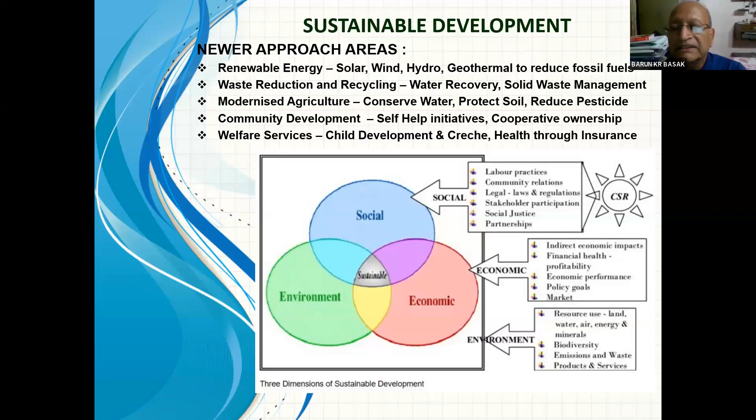Sustainable development goals, you have already seen in the last lecture, last session, that it was adopted in 2015, the target being 2030. There are 17 goals, and these are constructed in form of three basic pillars. One is environmental pillar, second is social pillar, and the third one is economic pillar, giving all the sustainable development 17 goals categorized into these three pillars.

Make cities and human settlements inclusive, safe, resilient, and sustainable. Make them hubs for ideas, commerce, culture, science, productivity, social development. And very important that efficient urban planning and management are put in place.

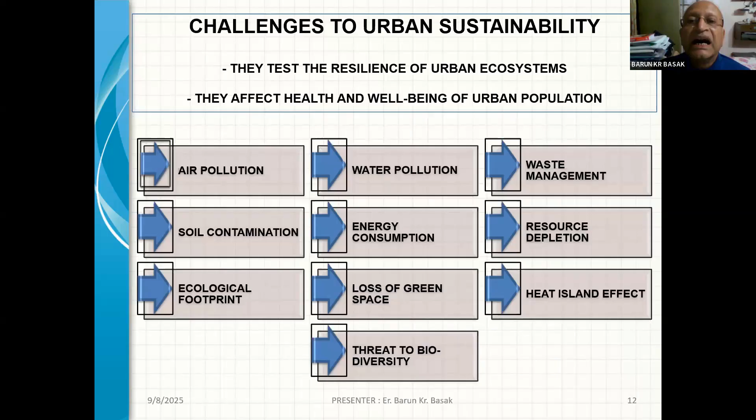What are the factors? Air pollution, water pollution, waste management, soil contamination, energy consumption, resource depletion, ecological footprint, loss of green space, heat island effect, and threat to biodiversity. These are the challenge areas. We need to address each of them separately, with technology and strategy.

What are the effects of these hazards? Mindless urbanization eventually affects every citizen, you, me, and all. Inequality of distribution leads to unrest and insecurity. Pollution deteriorates everyone's health and productivity, we all know. Economy gets affected from poor labor productivity. Enhanced natural disasters disrupt everyone's life.

Poorly planned urbanization generates huge slums. Quality of life suffers both at home and in public places.

Now, after the pledge was taken in 2015, the SDG 11 urban sustainability goal, what has been the progress so far? The number of nations with national and local disaster reduction strategies in place doubled by 2024 from 2015.

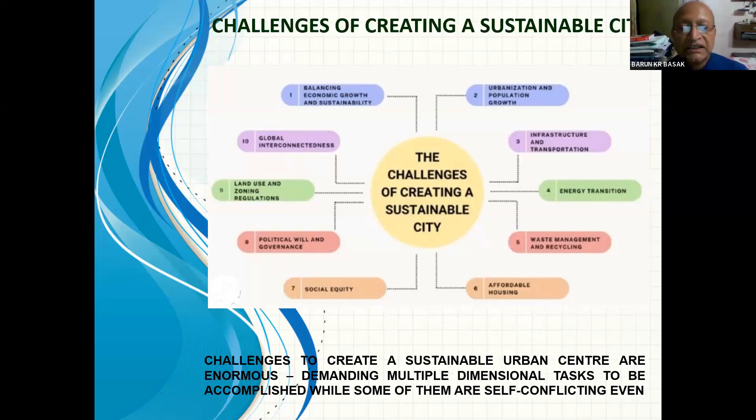Now, challenges of creating a sustainable city are shown in a diagram. The challenges are in the center, then around it: balancing economic growth, sustainability, global interconnectedness, land use and zoning regulations, political will, social equity, affordable housing, waste management, energy transition into renewable infrastructure and transportation, urbanization and population growth. All these factors are pictorially represented here. The challenges to create a sustainable urban center are enormous, demanding multiple dimensional tasks to be accomplished, while some of them are even self-conflicting. That is the problem.

Now, how do we plan for sustainable urban designs? These are some of the factors shown in the picture: walkability, where people should be able to walk freely, connectivity and connections, then shifting from private transport to public transportation, bicycle tracks, mixed use of infrastructure, and transport shown which can be underground. An important consideration in planning for sustainable cities would be its people and their connectivity.

Density in view, stress on eco-friendly public transport like hydrogen and electric, well-designed walkways supporting the aged with walking sticks or wheelchairs, children, so that they do not trip, and the challenged. Everyone should be able to use the walkway safely. Bicycle tracks, you can see those in many advanced countries, including in Japan. Even in Japan, people go to workplace by cycling.

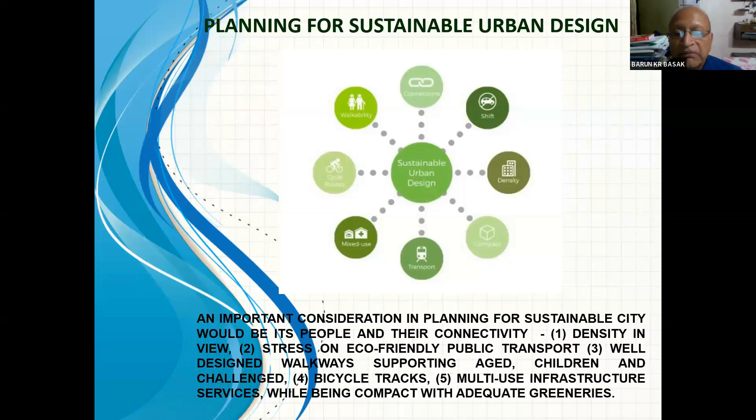Multi-use infrastructure services while being compact with adequate greeneries. Now, a few prominent actions: housing and basic services, public transport, urban air quality, waste management, disaster risk management, and resilience to disasters. How resilient are we? If there is an earthquake, what are the rescue arrangements? Sustainable urbanization, cultural and natural heritage, urban green and public places, urban planning, sustainable resilient buildings.

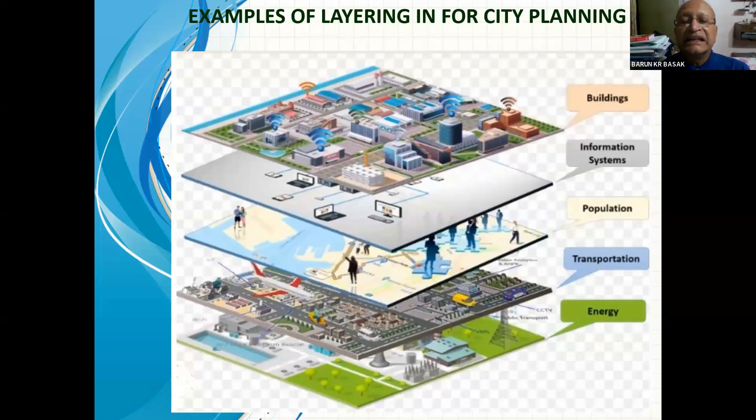This is an example of layering for city planning. In a computerization project, it is possible that in the same planned area, one layer has the buildings, one layer has the information system, one layer has the population connectivity. Population means mobility - where do they go and how do they go? Then transportation methods, which may be underground, overground, or cable carried. Then the energy levels, where are the plants located, the distribution centers. So various layering in city planning will be necessary.

One thing that comes to mind is that in every city, if there is an accident, they create a hump. What does the hump do? It slows down the vehicles. How do you slow down? By applying the clutch and the brake, and you slow down the speed. That way, the clutch lining and the brake lining wear out. If you slow down the speed and again accelerate to normal speed, there is added energy consumption, fuel consumption. There will be unburned fuel due to incomplete combustion, and there will be inefficiency in the fuel or energy conversion. So congestion means things like the hump on the road.

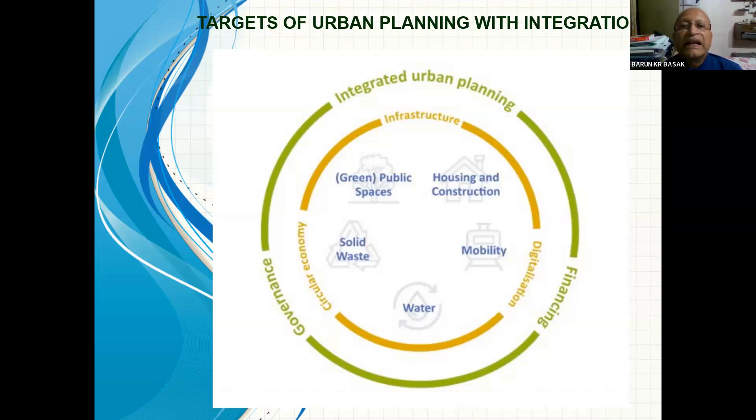The targets for urban planning with integration - what are the targets? You create green public space, you create housing by construction, you also create solid waste that has to be addressed. You have a challenge with mobility, you are challenged for the supply of drinking water and also drainage. So the infrastructure, digitization, control, planning - it has to be all integrated with governance and financing.

A concept of smart city is growing these days. In case of public service, digitization gives citizen services, tourism services. In fact, information on the arrival of buses at a point or reaching the destination - the roads may be smart, parking can be smart, control of traffic can be smart, lighting can be smart, surveillance can be smart - everything can be digitized and smart technology can be incorporated in the planning.

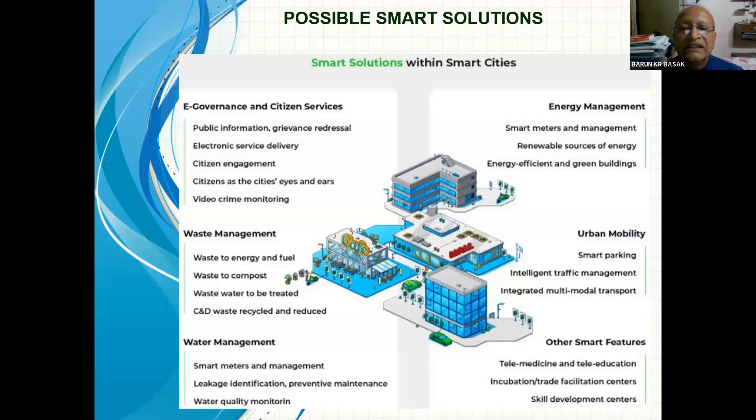The possible smart solutions again, within the smart city, you have e-governance, waste management, water management, energy management, urban mobility, and all other smart features incorporated in the planning in a way that you need to spend much less manual work, brain work. It is all programmed and takes inputs from the real-time system, and then it also adjusts itself for better control and management. This is sustainable - smart city again, smart home, smart government.

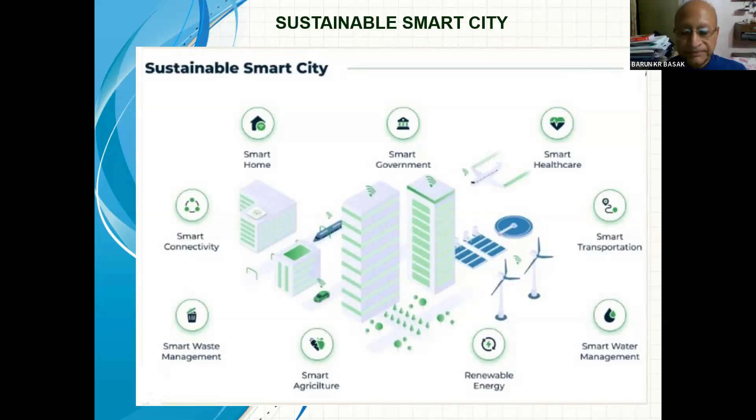What are the areas of smartness? Smart connectivity, smart waste management, smart agriculture, renewable energy, smart grid, smart water management, smart transportation, smart healthcare, digital - well, these are all the details.

60% will live in urban areas by 2030. Urban population growth every week - this figure is given, although I did not want to strain you with figures, but urban waste will grow by 70%. Then all the areas where smart management can improve things.

Now, this is a green city philosophy, how you integrate with nature. Urban green infrastructure means a network of green spaces within the urban fabric, both designed and wild natural areas, providing habitat for biodiversity and offering recreational facilities.

Green spaces as infrastructure are vital for air and water purification, as I explained, and temperature regulation, that is the heat island effect, and they encourage biodiversity by supporting a diverse range of plant and animal life, enhancing overall ecological health in the urban environment. There is a food chain and cycle in the animal kingdom, and these are all managed by biodiversity.

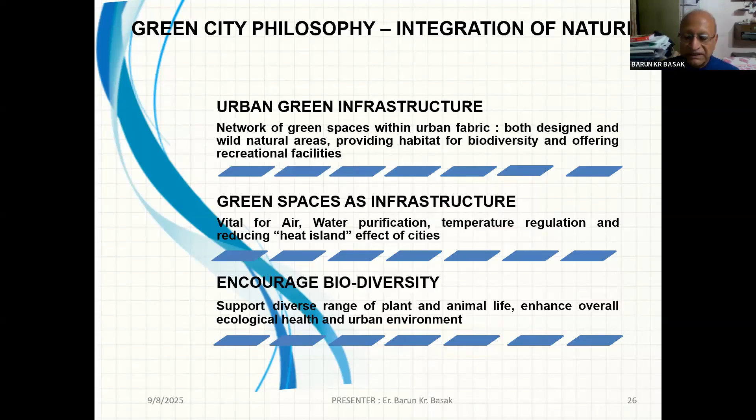This is how the heat island effect is explained. When you create an urban city from rural, then suburban, commercial, full-fledged city, residential, what we do is we cut the trees which have evaporation and transpiration, and instead, when you have the concrete jungle, the evaporative heat taken away to the air does not happen at all because there is no leaf, there is no vegetation. The soil is covered with concrete.

The curve shows how the temperature over this concrete city is highest, whereas in a rural area where you have plant and vegetation, on the left hand side, the temperature profile is comparatively lower. On the right hand side also, you see the rural farmland or suburban residential, where the temperature profile is also on the lower side. The maximum is in the concretized jungle city.

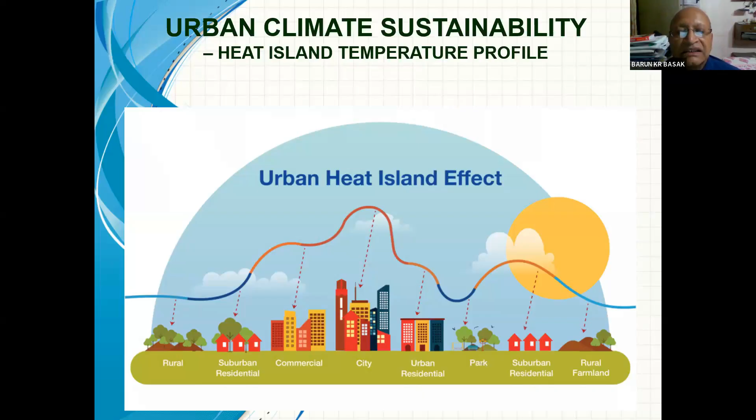Why? See how the heat island effect happens. In the rural area on the left hand side, where you have plant and vegetation, you have plant transpiration and water evaporation from the bare soil. Evaporation means it takes away the heat. Water also can penetrate inside the soil.

The excess rainwater penetrates, let me show you with the pointer. This is the water percolating into the soil, excess rainwater. The soil here on the top surface, which is almost bare, will evaporate its moisture and take away the heat, so it will be a cooler zone. Whereas in the city, you have covered the soil, removed the vegetation, there is no bare soil to evaporate moisture and take away the heat, and for the concretized structures, there is no plant transpiration.

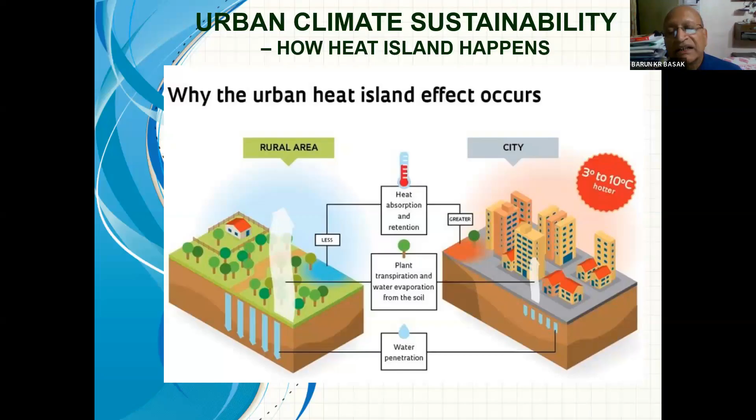Finally, the heat temperature in the city is higher and the percolation into the soil is much less because this is mostly covered area, and you have this 3 to 10 degrees centigrade hotter area, which is the heat island effect that is part of every city's creation.

Now, what are the resources for a green city? You have energy efficient buildings, you promote renewable energy sources and optimize energy use. This is through energy conservation, and this is how you create a green city.

Sustainable transportation means you can have free walking areas, cycling tracks, and common public transportation, which can be underground or over the cable. Reducing reliance on fossil fuels means you can have it electric or hydrogen driven, so the pollution is low and you are promoting use of electric vehicles.

Waste reduction and recycling is another resource for a green city, where you have effective waste management, recycling, segregation, composting, avoiding air, water, and soil contamination.

How do we do it? All the wet waste collected in the municipality can be segregated for composting. Wet waste doesn't mean everything can be composted, but the part that can be composted is sent to composting. The other part, the dry part, has to go for segregation, recycling, restoration, reviving, and pulling back into the circuit. And then the target has to be essentially zero landfilling.

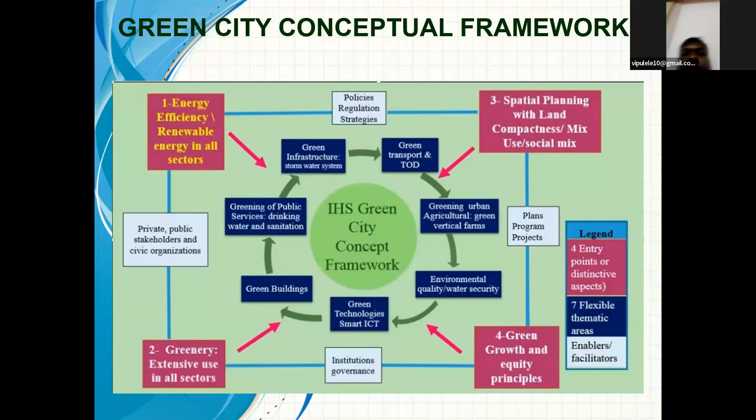Energy efficiency and renewable energy in all sectors is one big area. Greenery and extensive use in all sectors. The spatial planning of land compactness, the green growth and equity principles. Now the inner circle introduces green building, green technology, and all. I'll skip over to the next slide.

Now this is a very interesting green building concept. See, the green building has a big tree on the west side. In our situation, that gives the shadow, that gives cooling on the west side. Then on the south side, on the roof, you have the solar panel.

And inside also, you see the energy efficient windows and glass, light colored roofing, and rainwater collection for harvesting. All sorts of energy efficient lighting - everything incorporated in the green building. Those are the parameters to be considered in designing green buildings.

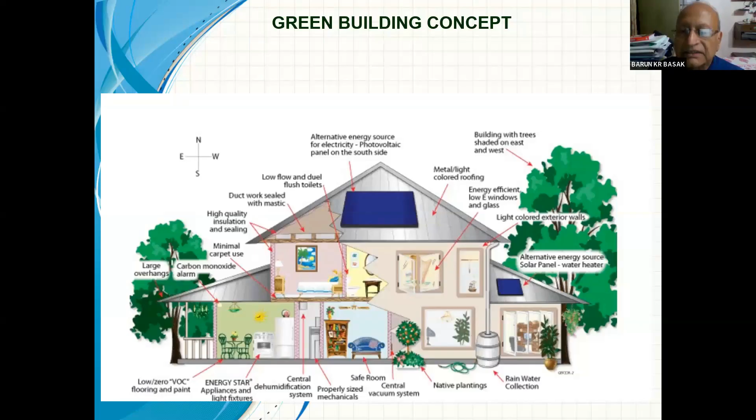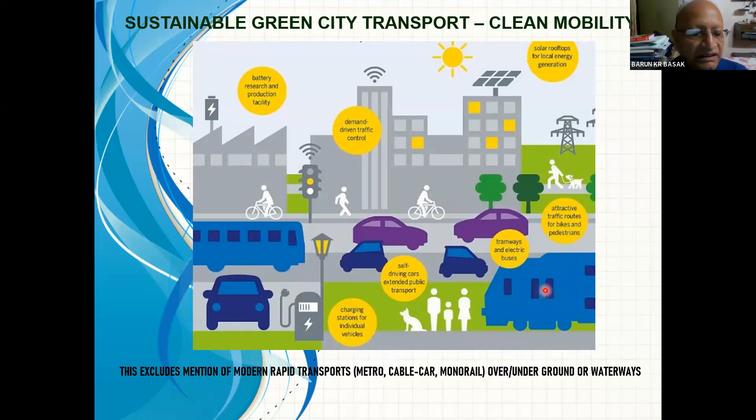When we consider transportation, you see everyone is considered. One who is walking - I'll show you with a pointer. This person is walking, this is cycling, there's a cycle track, then even walking the pet - this is for everyone. Then this is the electric vehicle, with battery research production facility, demand-driven traffic control, solar rooftop here, electricity grid and all. This is the metro concept, tramways and electric bus - this is for the transportation.

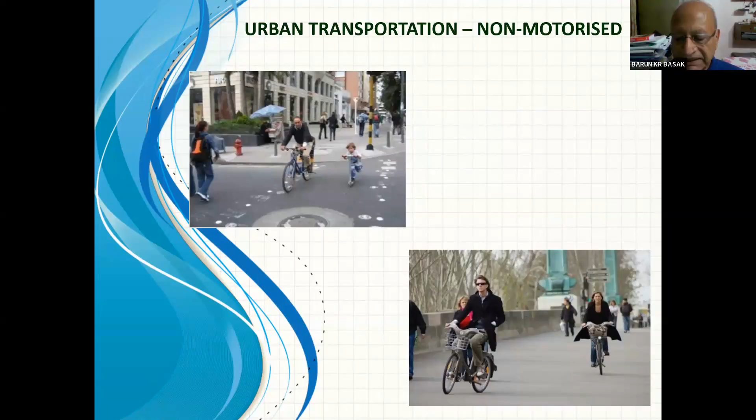Here you have the cycle track, not only for the adult but also for the kid. See in the next picture, people are comfortably and safely riding bicycles.

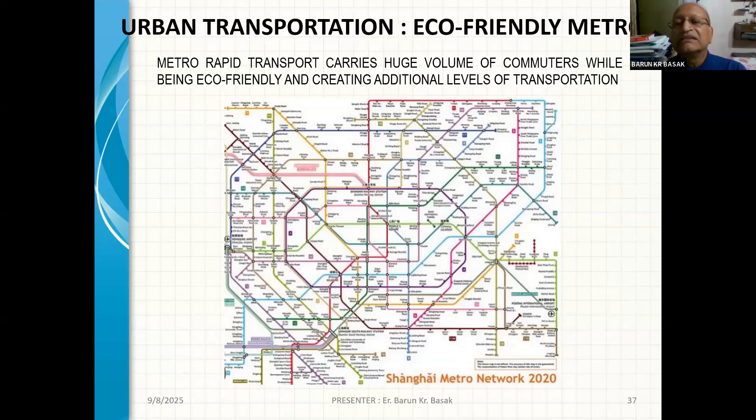Now this is a sample of urban transportation through metro. You see the network that is underground - it is the Shanghai Metro Network 2020. This network covers almost every part of the city. And if it's underground, it doesn't affect any mobility of anyone on the surface. And it will surely be electrical or hydrogen, so it is environment friendly.

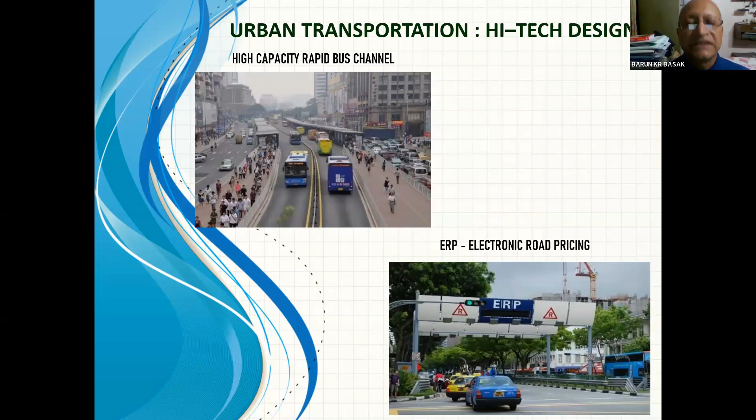Now, while we plan for the good urban sustainable city, we need to take care of all the road safety measures. One can see the warning boards, one can see the zebra crossing, one can see people carrying perambulators and safely crossing the road.

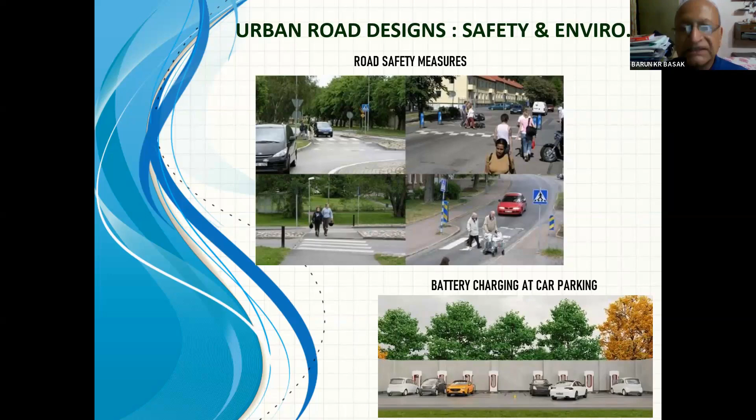The next picture is about battery charging facilities at car parking - for any car that will be parked, there will be facility for charging as well. So these are the features to be incorporated in the planning.

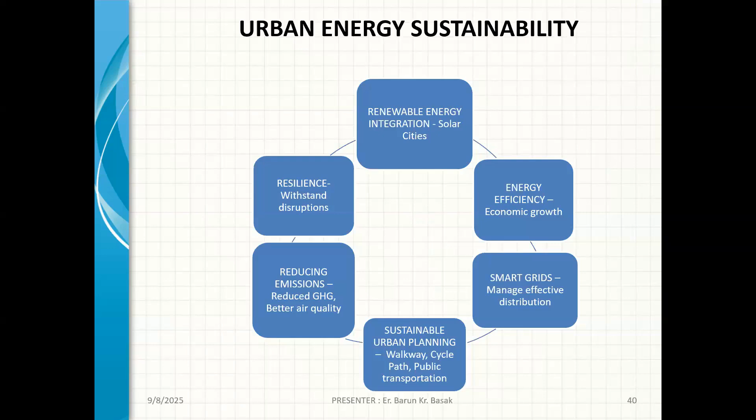Coming to energy sustainability, after transportation. Renewable energy has to be resilient to withstand disruptions. As you learned earlier, solar gives power only in daytime, wind depends on wind flow, thermal generates depending on load factor, and hydel can give you a fill-up balance when a power plant has shut down but demand has risen. So energy efficiency and smart grid for effective distribution are the essentials of energy sustainability.

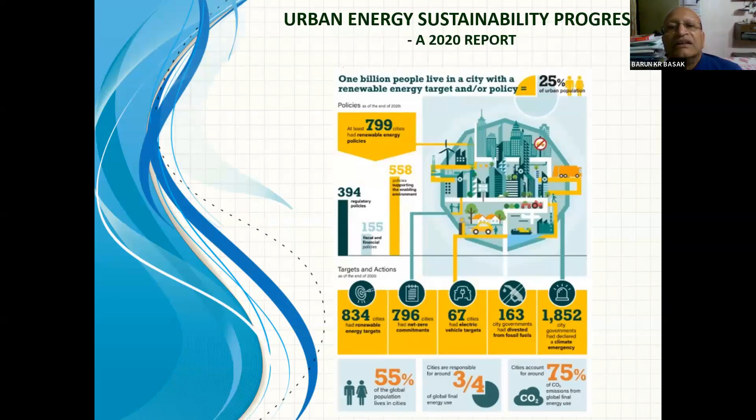Well, these are some figures on renewable energy targets for 2020, from an old report. Now we come to prospects in urban planning.

Prospects in urban planning include integrating solar PV systems, MSW energy systems, micro wind power systems, and green hydrogen production, all integrated with energy infrastructure. Residential buildings, commercial buildings, and city transportation will all need energy, each with a different strategy, loading, and volume.

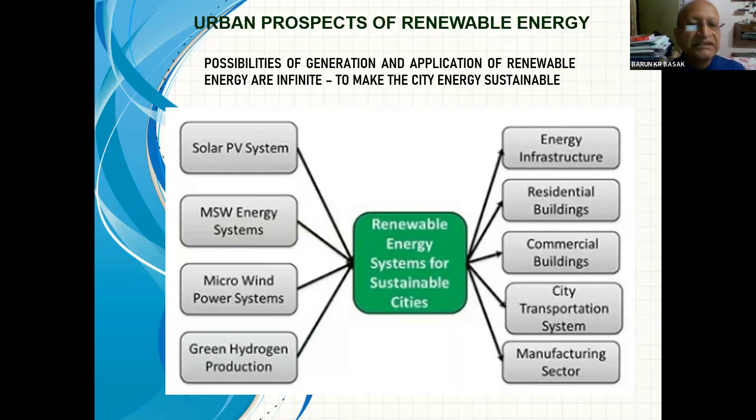So there's a different profile, power profile, and requirement profile for different markets. The consumption part is tabulated on the right hand side, whereas the availability sources are tabulated on the left hand side.

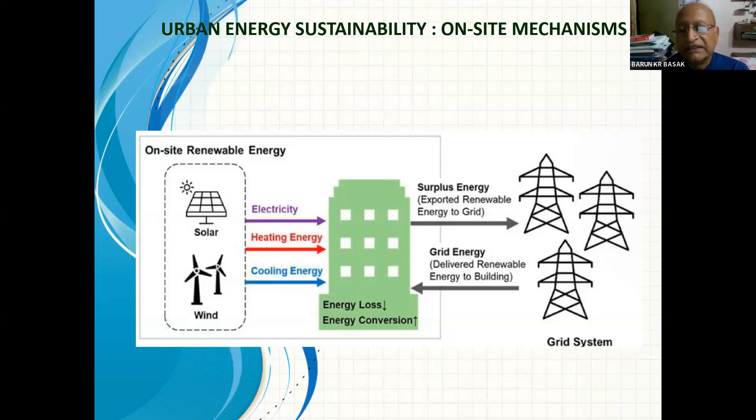From power, we come to urban water sustainability. Water infrastructure makes it possible to integrate water sourcing, treatment, and supply for domestic and industrial needs, power generation, wastewater collection and recovery, treatment, recycling and reuse. That is the entire water circuit.

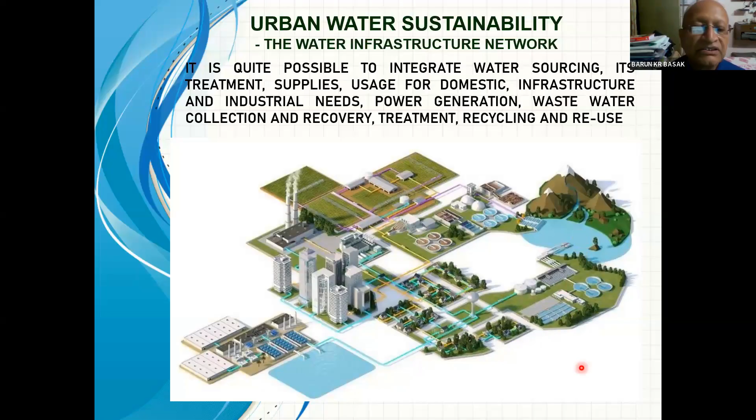You see on the right hand side, the water catchment area. There will be a well, a treatment area, a power generation area, the consumption area, then the sewerage, drainage treatment, and putting clear water back into storage again. So this is the total water cycle.

Now, metering system is very vital for sustainability of water in urban cities. Here you can see suggested metering points: where raw water in the catchment is drawn as bulk water, metering at the water treatment plant, then power, chemical, labor, water quality, point of production, and production meter.

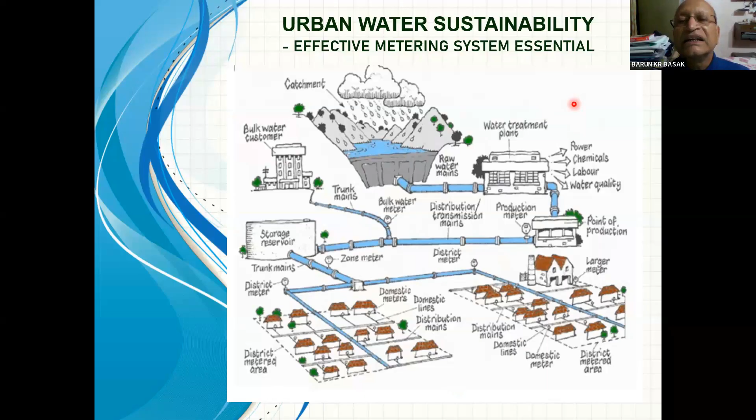After that it goes to distribution and transmission mains. There are bulk water customers, storage reservoirs, zone meters, and distribution to various localities. Metering accounts reconcile all the water that is drawn, processed, supplied, distributed, and consumed, and correspondingly one can have metering, billing, recovery, and revenue generation so that it is self-sustainable.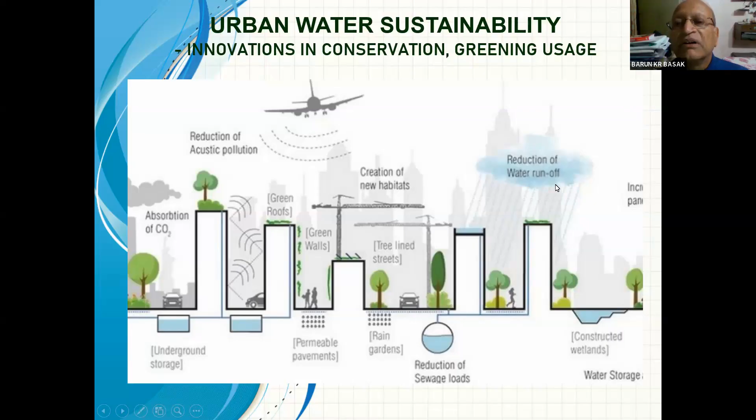This is the sewage load, absorption of CO2, and how nature and greening are integrated with town planning and water - reducing water runoff by collecting excess rainwater for reuse.

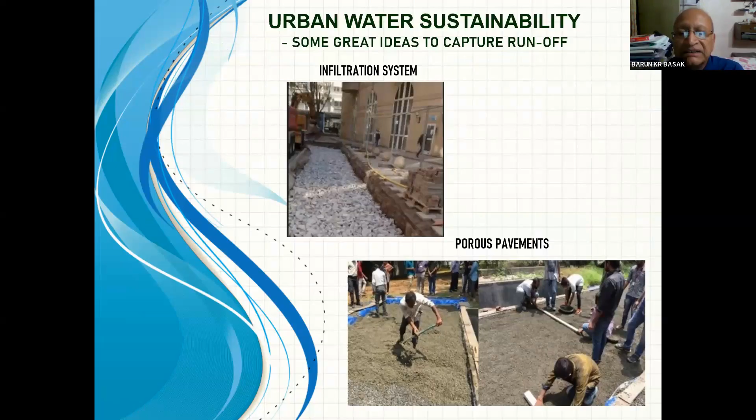This is a picture of an infiltration system. In the left picture you see pebbles through which overflow and runoff water can go into the ground or get collected into storage. At the bottom picture you see porous pavements so that water goes back to the earth.

Drinking water sustainability: drinking water can be contaminated during supply, production, or distribution. With population growth, the problem aggravates. This requires planning for its constant availability and good quality in processing.

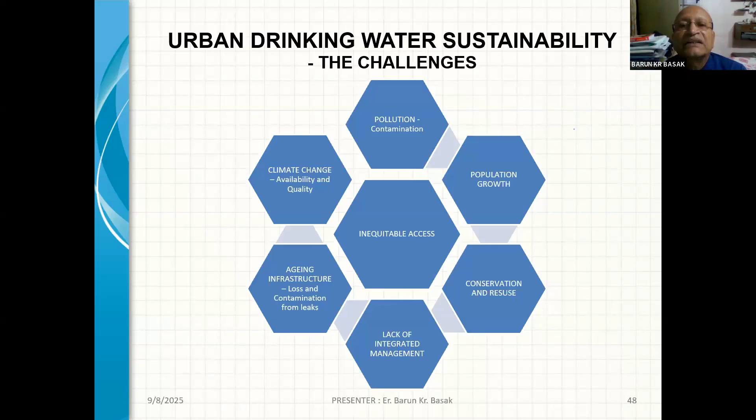There will be losses and contamination from leaks, so loss maintenance is important. All these factors are challenges for good water management and its sustainability. What do we do?

Water from the catchment goes to the treatment plant, then to the drinking water distribution system or to industry. But there is also another storm water system for excess rainwater, which has to be treated after collection in the wastewater system before being fed back to the stream.

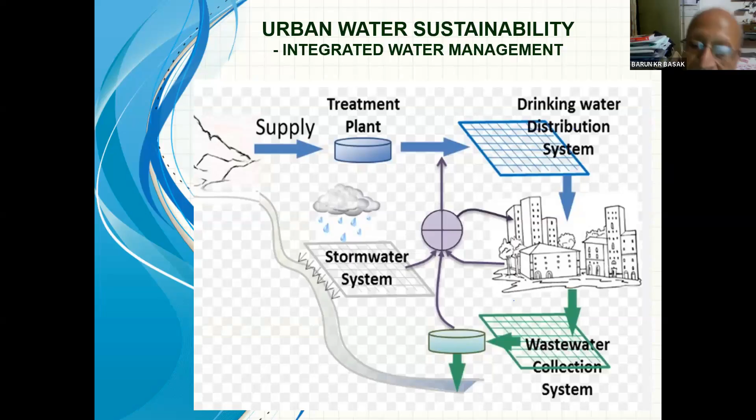And this is the total circuit of supply, treatment, distribution, rainwater, runoff water, storm water, and drainage water going back to the reservoir.

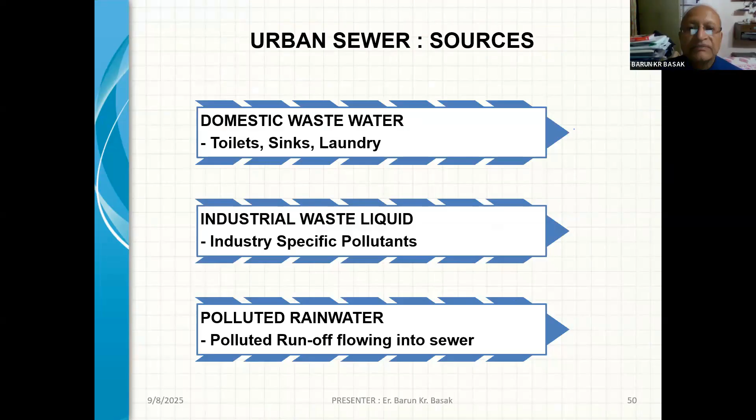Now we come to sewer and wastewater. Wastewater in domestic areas comes from toilets, sinks, and laundry. Industrial waste liquids have industry-specific pollutants and mixtures, and polluted rainwater is the runoff flowing into the sewer. What are the hazards associated with urban wastewater?

Public health: harmful pathogens cause waterborne diseases. Nutrient pollution, excess nitrogen and phosphorus, causes ecological impact. Sewage sludge is also a hazard. Water pollution: untreated sewage pollutes water bodies, depletes oxygen, and harms aquatic life.

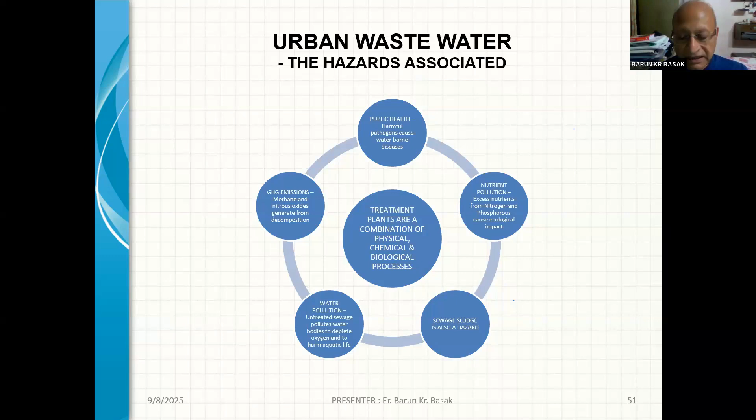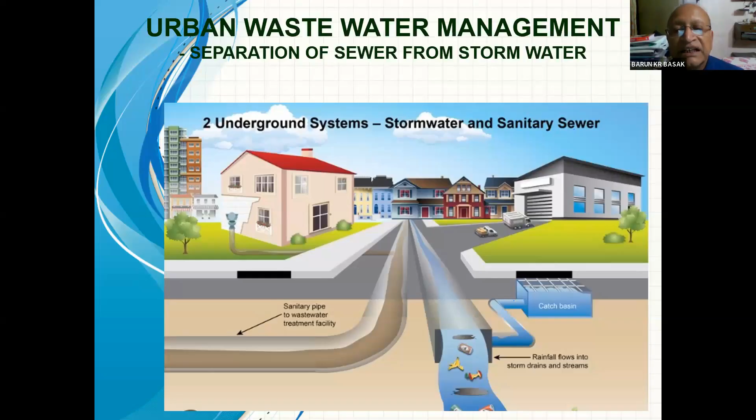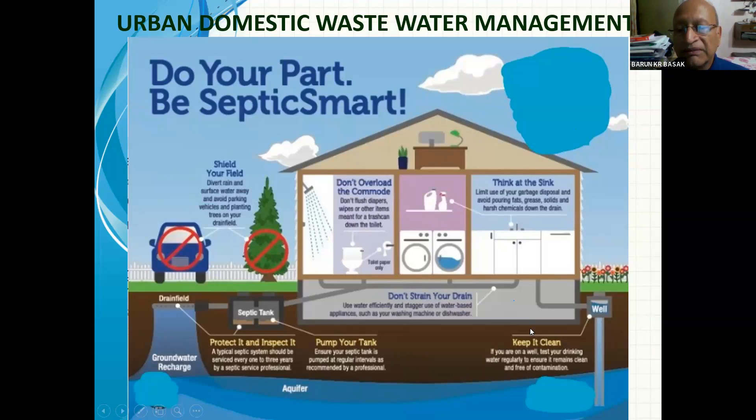Recoveries. Various ways of recovery.

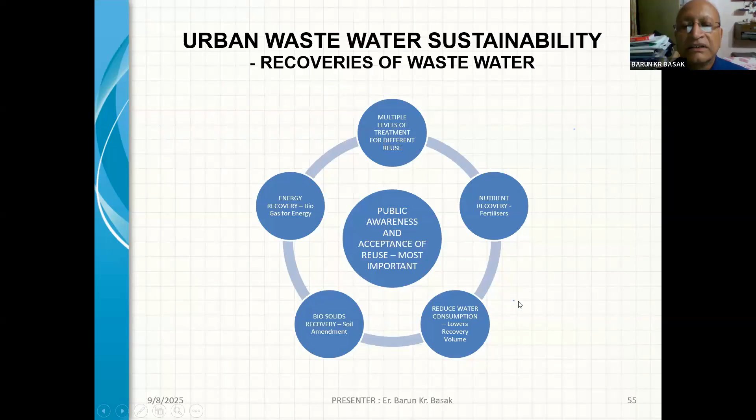Now, for the home septic tank to be operated for long, the sludge sedimenting at the bottom also has to be evacuated and taken out from time to time, which we seldom do. Municipality facilities or infrastructure have to support the evacuation of house septic tanks, otherwise if it gets full, then where is the space for continuous generation?

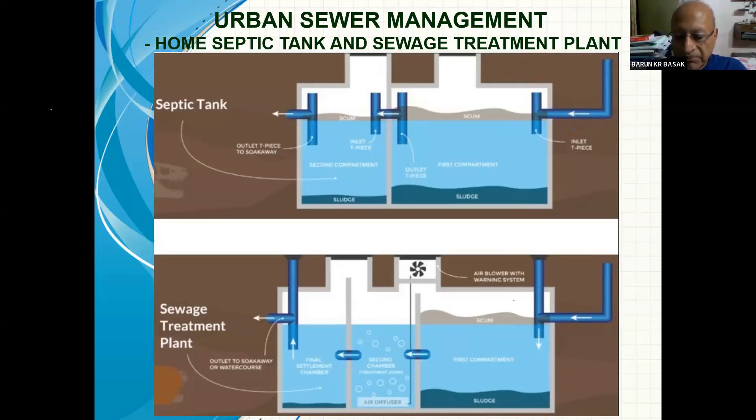One, we have to reduce the waste first of all. Then whatever waste is finally generated has to be segregated. Segregation: part of it is wet waste, part of it is dry waste. Wet waste has to be segregated for usability as compost that can be composted. And then the dry waste has to be segregated for recycling, recovery, reuse. And finally, we have to target for zero land filling.

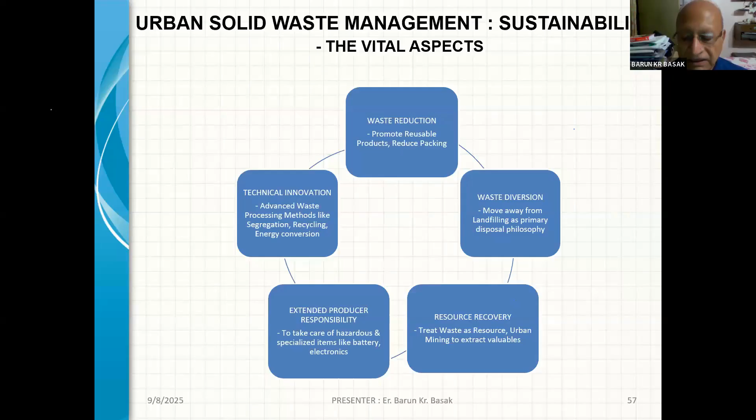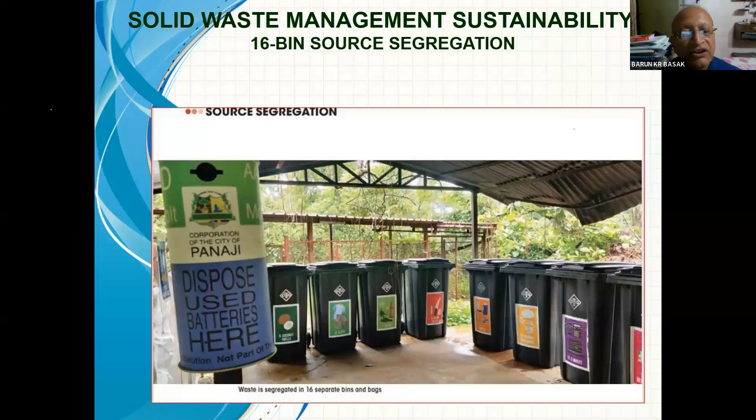Medical can be categorized into 4, 5, 6. Then solid can be categorized into many. Liquid can be categorized into many. So here are only 16 separated bins, whereas in the municipality we get fed up segregating into only two, dry waste and wet, green and blue. That is not everything.

Similarly, when it is solid, unless you segregate, you have in the solid waste so many things. You have even the door closers, cylinders which are explosive. You have the aerosol cans, explosive.

Unless you cannot incinerate them straight, if you put it into the incinerator, they will burst. So first of all, segregate.

Similarly, there are many things like paint, varnish, or some VOC, volatile organic compound, that cannot be put into an incinerator. They must be segregated and treated differently. So segregation is the first and most important process. You cannot compact them and send to landfilling or to an incineration plant. That is wrong.

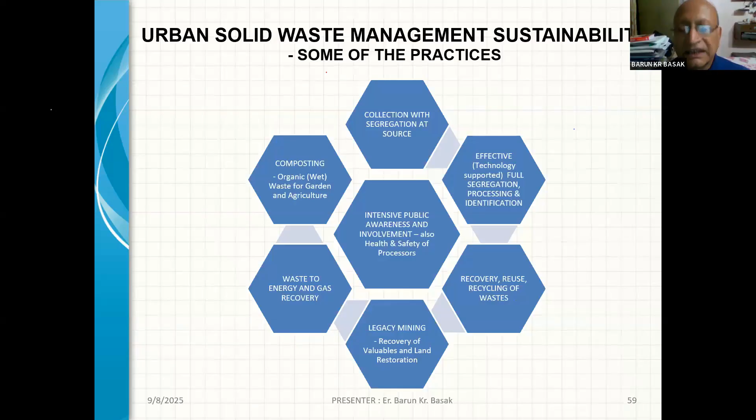What is the objective of solid waste management? Public hygiene and health is foremost. Then reuse, recovery, and recycle is the technical requirement. You can have energy generation, then sustainable development and aesthetics.

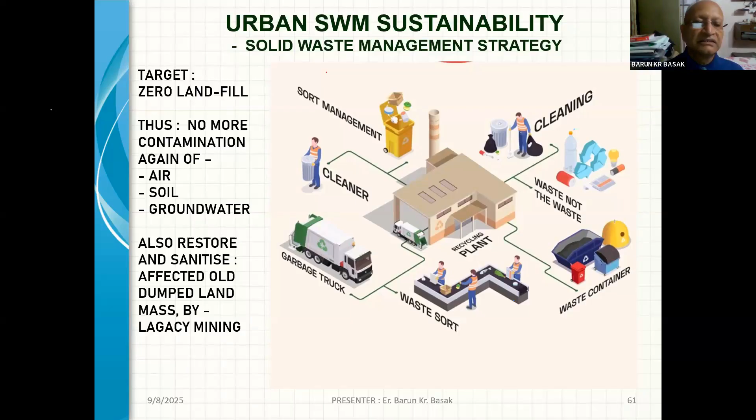Solid waste management strategy is described here in the picture. The cleaner collects, there is sorting in the bin, it goes to the recycling plant by the garbage truck also. Then waste is sorted, waste containers for segregation on the right. Segregation is the most vital activity of solid waste management.

We come to clean air. So how does air get polluted in cities? Through industries, through construction, through transport, through agriculture, and by domestic activities also.

What is the health impact of pollution? It has effect on the respiratory tract, or it induces cardiovascular diseases. What are the environmental impacts? Ecosystem impacted, climate change impacted.

We have stationary power generating plants with fumes, and from industry, domestic fumes. What are the combustion emittents? From mobile sources, from stationary sources, from all sources, combustion products are CO, CO2, sulfur dioxide, nitrogen oxide, particulate matter. These are the primary pollutants in the air. I told you earlier that any combustion anywhere depletes oxygen and also generates these gases.

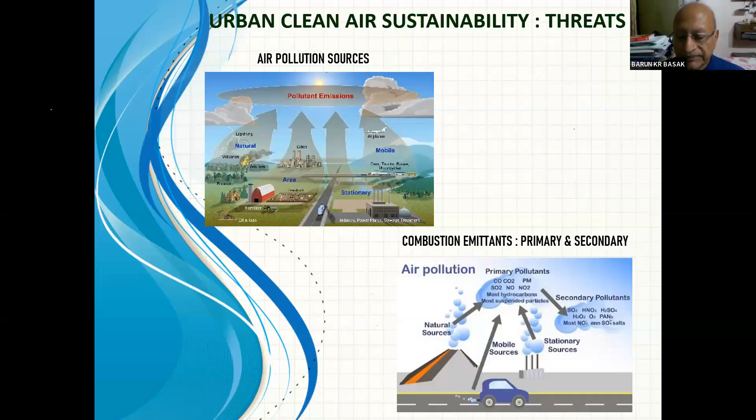Clean air sustainability, some of the strategies: green space, create green space parks, vertical gardens, energy efficient buildings, and reduce burning fossil fuel.

In fact, the target should be to go over to electricity, because we get electricity from huge and efficient power plants where, with technical investments, the pollution or emission can be controlled much better than domestic combustions or vehicle combustions. So electrical energy that way gives much less emission because of its efficiency and technical investments, and the pollution is much less compared to the equivalent domestic consumption.

That way, we should attempt to move over to electrical heating, electrical burning instead of coal burning or even LPG gas burning and natural gas burning, all of which will generate emissions, maybe sulfur is less in LPG or natural gas, but every combustion will give emission of CO2, SOx, NOx, particulate matter. Electrical heating at least would not give combustion products.

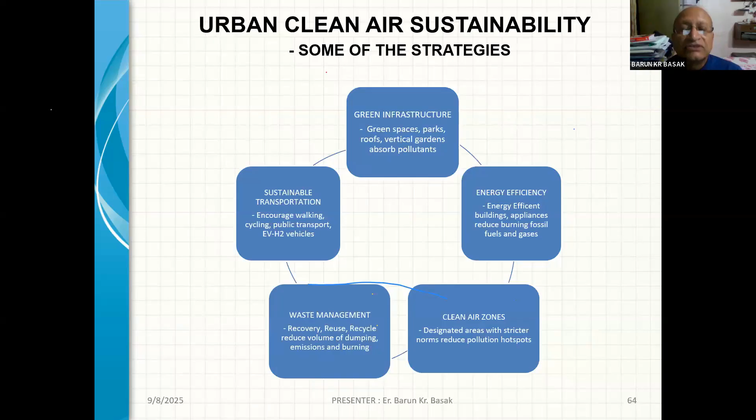Now, the other thing for clean air is encouraging walking, cycling, use of public transport, hydrogen vehicles, EV vehicles. Also waste management, if you reduce incineration, burning or dumping, then also air gets cleaner.

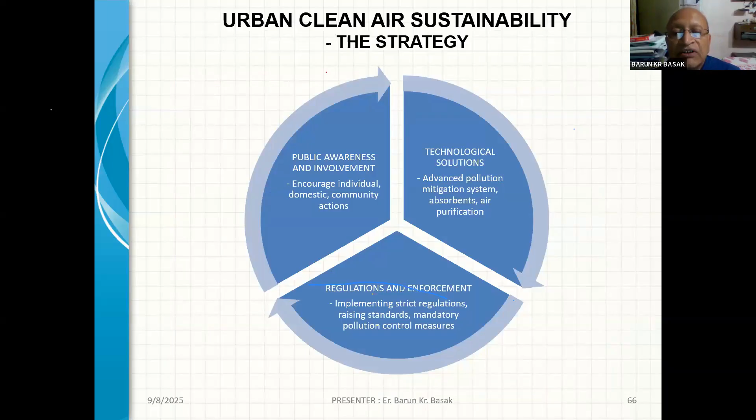Clean air sustainability: how do we encourage and instill public awareness and involvement? We have technological solutions, we have regulations, regulatory processes, and enforcement.

Sorry, where are we going to? Slide show again. Correct slide, yes.

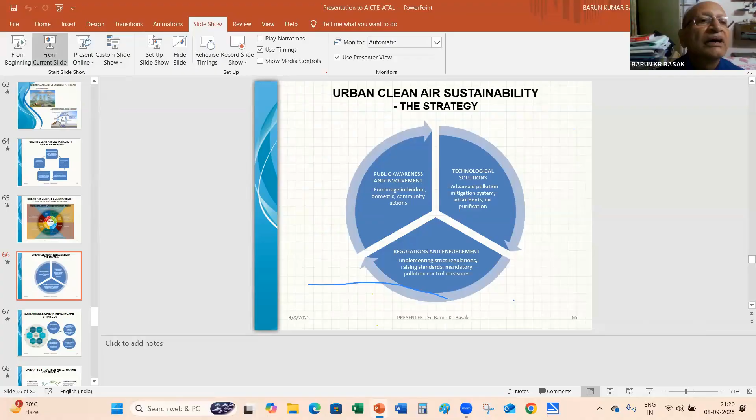One minute, give me a minute. Yes.

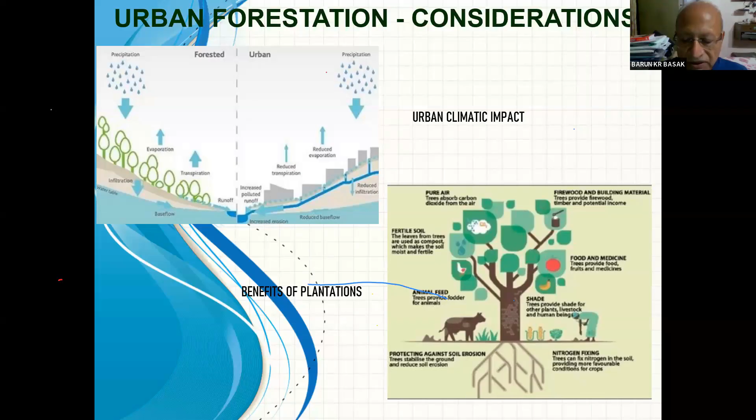The precipitation will get reduced also. So you have reduced collection of water, or recharging the soil with water, and increased temperature. So we know the benefits of afforestation and reforestation, and we know that urban centers cause this problem. We need to address that issue by afforestation or reforestation.

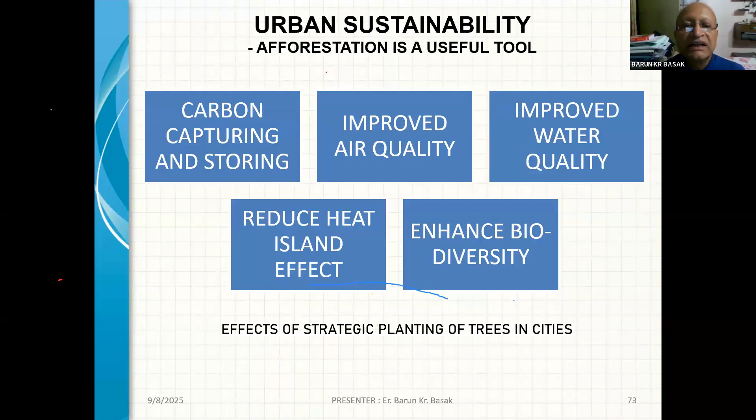Afforestation is a useful tool for carbon capturing and storing, improving air quality, improving water quality, reducing heat island effect, and enhancing biodiversity.

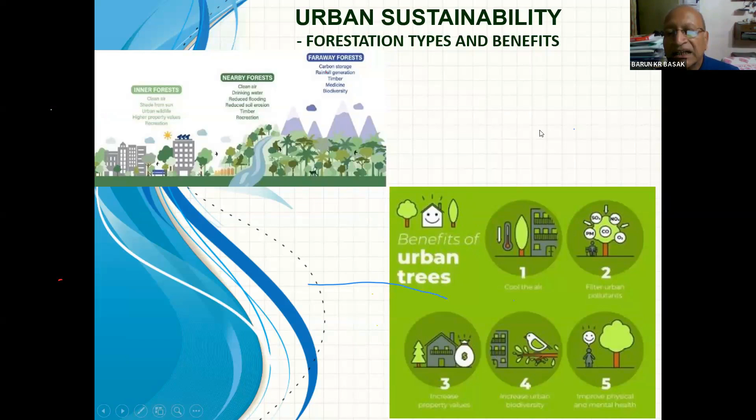Forestation types and benefits: you see inner forest, meaning within the city, within the locality, in the neighborhood. Then there can be say, center park, then nearby forest and far away forest. All three are possible for forestation. And you see on the right hand side the benefits we get from urban forests.

How much time? Now I have come towards close. Sir, it is 9:29. How much? One minute more.

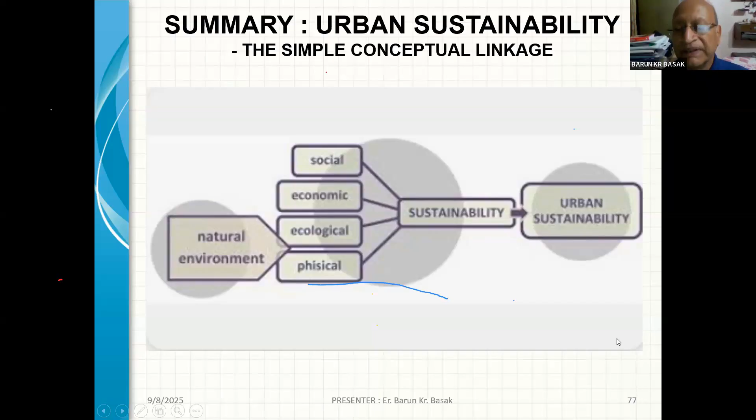One minute. So you get environmental benefit, social benefit, and economic benefit through the sustainability effort. The simple conceptual linkage is this: natural environment, social, economic, ecological, physical, they combine together to give sustainability, of which urban sustainability is a part. And this is the circular relationship of the natural system with society, economy, agriculture, resource, environment, and employment, cyclical.

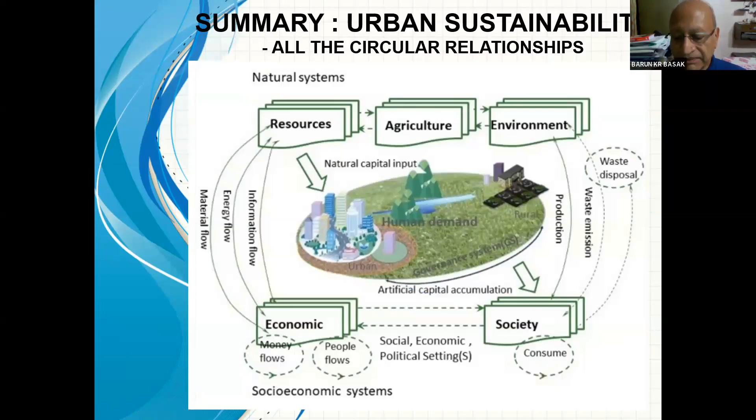And thereafter, let's save the world together. I have exhausted the time now.